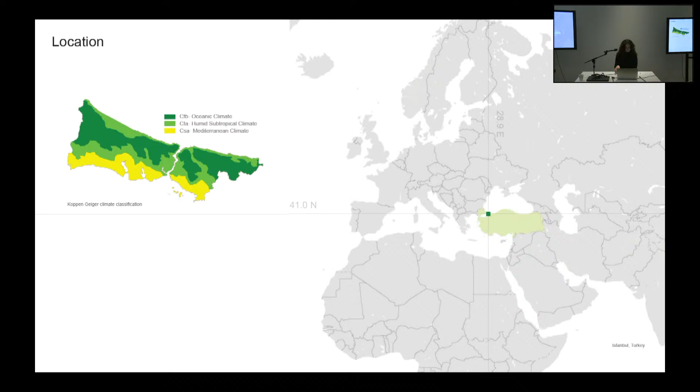Looking at the annual hourly climate, the cold period is from December to February, with limited solar radiation that barely reaches 400 watts per square meter. The temperature always ranges below comfort band, and in January and February it sometimes goes below 0. During summer, temperature generally ranges in comfort band with some overheating days in July and August. So overall, the primary concern would be the cold period.

The monthly average air temperature shows the cold period has a 7.9 average, with the coldest month being February with an average of 7.2 degrees. The warm period has an average of 24.2 degrees, with August being the warmest month with 25.4 degrees Celsius. Comparing it with the 2080 A2 future climate scenario, the monthly averages will be increasing 1.2 to 2.8 degrees.

Throughout the year, wind speed and direction are consistent. The dominant wind direction is northeast all year. The frequent wind velocity is about 5.3 meters per second with 25% frequency.

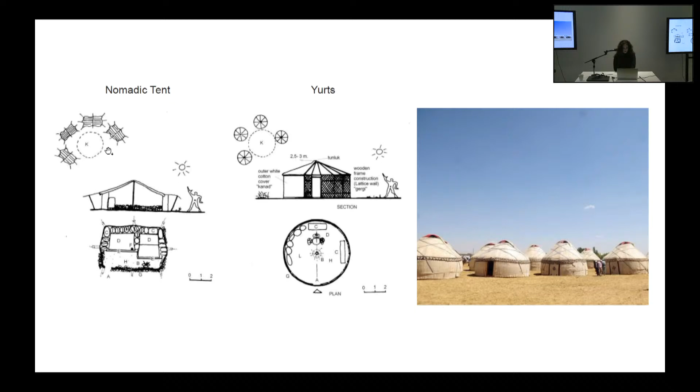In the tents, units were laid out separately, belonging to different units of the family and creating a central space in between.

This converts to the vernacular timber houses. It's pretty much developed from inner space to outer space, just like the nomadic tent. Some of the important features: first of all, there's a common space where the rooms open up. This is used as a multi-purpose transitional space, can also be interpreted as a square that connects all rooms. Wood is generally preferred for lightness, easy manufacture, and availability in the geography.

Another important feature is the projecting bay windows. While the ground floor is sitting on stone, the upper floors were adjusted with bay windows for privacy, sun, and ventilation. External shutters were operated for hot summer days and cold winters.

However, in contemporary concrete blocks, quite a lot of things have been lost, and housing scarcity encourages developers to embrace this type of typology. Some of the problematic aspects are the deep plan, strong division of spaces, isolated living room and kitchen, lack of consideration of orientation or occupant comfort, and lack of quality in building materials and interior finishes, because the first aim is to build really fast.

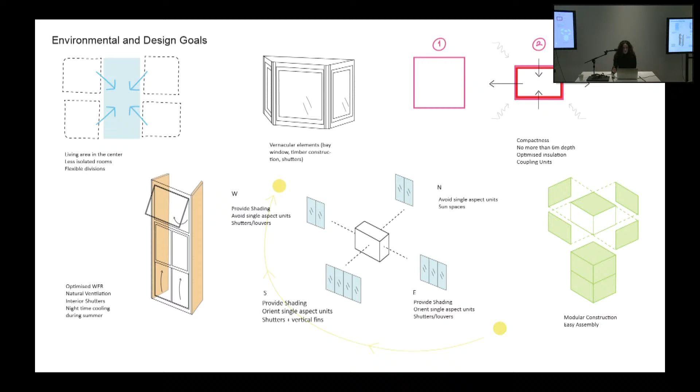There needs to be more attention given to the orientation and what's going on around with the obstructions, and more compact design that also allows easy assembly and construction. So the ideal module brings together all the main design concept and environmental concept ideas.

It is very compact and only provides essential facilities. With the addition of the bay window space, it's 35 square meters. The living room and the kitchen comes back to the center, and other functions are surrounding from the center.

The separation between the different functions of the spaces is flexible, and for double aspect units, openings can be provided in the bathrooms for daylight.

The addition of the bay window is functionally quite beneficial for a very compact layout, but at the same time it can be used as multi-purpose, like dining area, lounge area, or office.

So the unit is constructed with 1.2 by 2.4 CLT panels. The different configurations of panels can provide different layouts. The main benefits of prefabricated construction are efficient, fast construction, and high quality building envelope.

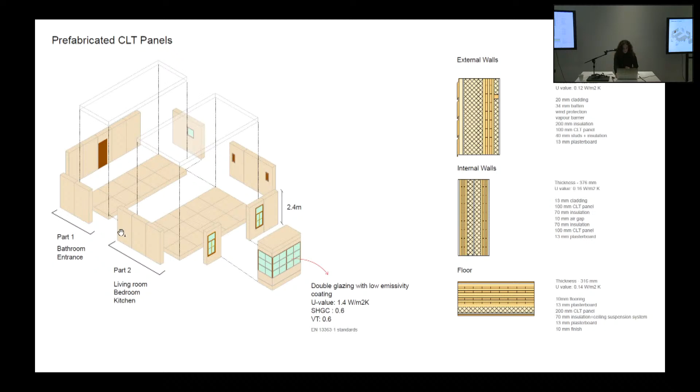And according to the transportation regulations, the module would consist of two parts, one including the bathroom and the other living room, bedroom, and kitchen. So how these modules can come together.

The project site is located in between the business center and residential area called Levent in Istanbul. The surrounding buildings are in close proximity, about 4 meters, and the street is quite narrow. These residential buildings are 2 to 6 stories high, having small local shops around the ground floor.

The project site is 19 degrees rotated to the north-south axis. There are roads to the north, main roads to the north and east. The south and west sun would be blocked by the surrounding residential buildings and the predominant wind in the northeast direction. The road on the east side is busier than the road on the north.

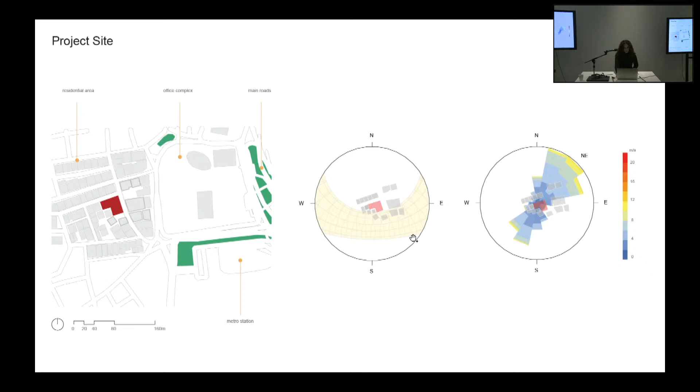Therefore, the apartment entrance is placed on the north and retail spaces are placed on the east side. Considering the compactness of the module, there's also a storage space given to the residents on the ground floor.

Moving on to the massing study reflects the site analysis. First, the raw massing site is offsetted from the streets to create adequate spaces because these facades also have windows. And the retail lobby and storage space is placed on the ground floor and modules are being stacked on top.

The common spaces are strategically placed in between the modules on the south and east facade with the core and circulation pad supporting these spaces. As you can see, the modules are oriented east and north where the main roads locate due to the limitations on the west and south facade and the close proximity of the buildings.

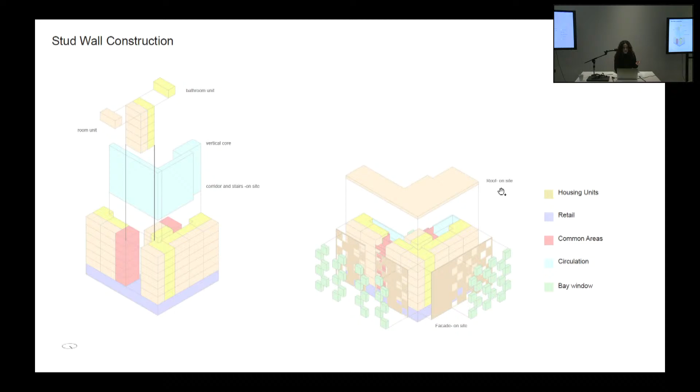So it will be built with stud wall construction where the bathroom units and room units will be delivered and it will be stacked on together, and the bay windows then would be in addition. The roof, facade, and the circulation would be built on site.

Again, the units are mainly oriented to main roads where they can also be benefited from solar gains. Coupling the units in the north is important, and the common spaces were integrated conceptually as the transitional central space. Also, the compactness of the units and occupants being students or young professionals, it's important to have these areas.

Looking at the solar radiation, it's during summer on east facade, where most of the units are oriented, gains radiation around 200 kilowatt hours on the top parts, and it reduces to 100 moving below.

On the north facade, there's very limited potential, around 70 kilowatt hours per square meters. And also during winter, all facades receive very limited radiation except the top floors of the south facade.

As there are very limited solar radiation during winter, in order to achieve thermal comfort in the modules, it is important to have an efficient envelope design and use of adaptive opportunities.

So analytical studies basically focuses on two modules, one looking to the east and one looking to the north. There are four main cases that has been illustrated here.

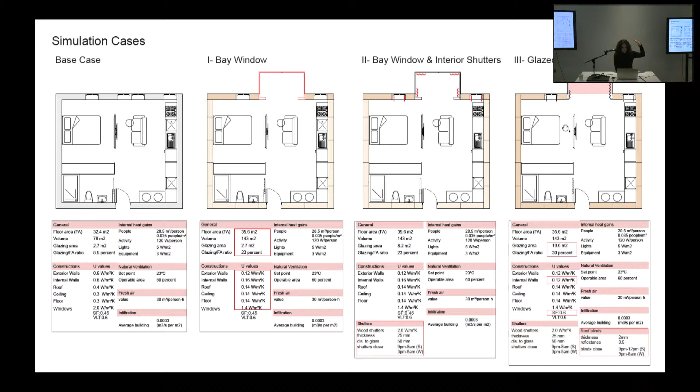The first case is addition of the bay windows and changing the construction to prefabricated CLT panels. The second case would be bay windows and interior shutters, and the third one would be addition of the glazing on top of the bay window roof.

The thermal simulation results show that during winter, the indoor operative temperature of the east module has potential to increase about 5 degrees from the base case on sunnier days. The indoor temperature remains stable, slightly below the comfort band, between 18 to 21 degrees.

During summer, compared to the base case, the glazed roof case increases the temperature about 4 degrees during the day, while keeping the same temperature at nighttime.

During spring, the indoor temperature of the east module increases about 3 to 6 degrees from the base case and ranges generally in the comfort band in free running, between 20 to 26 degrees.

During summer days, we can see the importance of radiation, as the extra glazing of the bay window sufficiently heats up the space. In order to avoid potential overheating, roof shading should be operated accordingly.

In autumn, the temperature increased about 5 degrees and stably ranges in the comfort band. The most affected seasons can be observed as spring and autumn.

In the east unit, the thermal comfort in free running mode shows only the addition of the bay window increases the comfort hours 7%. In east units, comfort hours increase a total of 23% with the addition of the bay window, interior shutters, and the roof glazing.

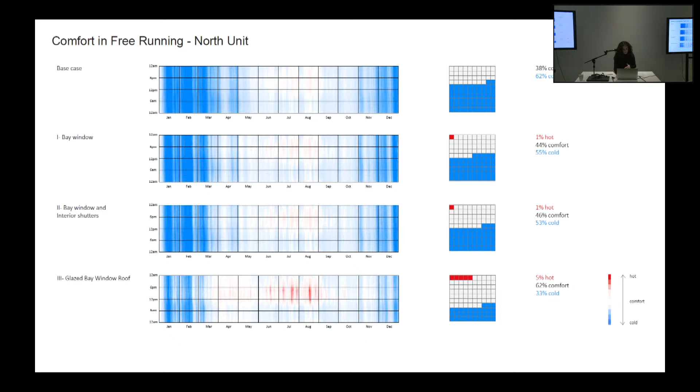Overall, the primary concern in the winter period is that the operative temperature of both east and north units ranges slightly below the comfort band. It is seen that the addition of bay windows is efficient for both orientations, north and east.

So the heating demand, looking at the cold period, from base case to the last tried case, for north it decreased from 25 to 13, and for east it decreases from 24 kilowatt hours to 11.

Daylight studies are run for two different targets for different spaces: 300 lux for living spaces and 100 lux for circulation and bathroom. Due to the open and narrow floor plan, the addition of the bay window, living spaces reach 300 lux target more than 50% of the time, and even the far back of the module receives 300 lux at least 30% of the time.

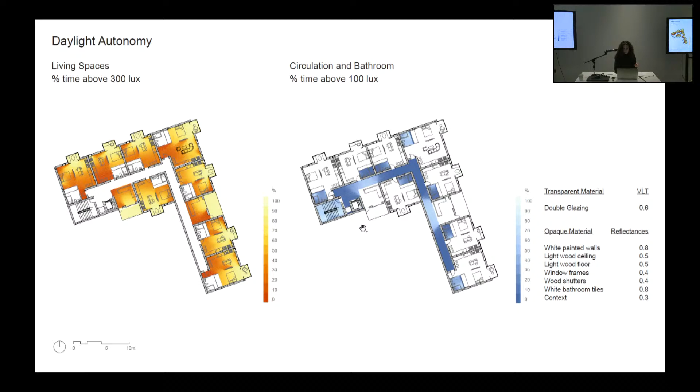The circulation path receives daylight from common areas that open to balconies. The units that have double aspect reach the target around 50% of the time. However, it is being lost for units that don't have the double aspect.

For conclusions, the compact unit provides essential facilities and spaces for 1 or 2 people to occupy the unit. The addition of the bay window, which is a traditional feature, is a multi-use space that can provide functional benefits and environmental benefits. Analytical studies show that there are also thermal and daylight benefits.

Overall, for both east and north orientations, the addition of the bay window brings benefits by providing daylight and becoming a solar protector and solar collector, by opening up to different orientations that the units would normally not open up to. And having a high glazing ratio, the bay window makes the space more sensitive, so therefore shutters and additional insulation during cold nights is important.

Further studies can be conducted with the operation of the shading devices, and right now there is a conceptual partition between the bay window and the actual module.

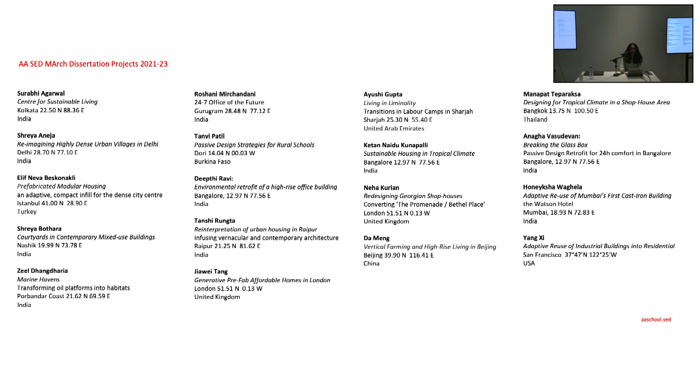I'm dealing with the glass box typology, and the title of my dissertation is Breaking the Glass Box, which is a passive design retrofit approach for 24-hour comfort in the context of Bangalore.

Just to set the scene as to where Bangalore is in the world, it is about 13 degrees north of the equator and is a city in the south of India.

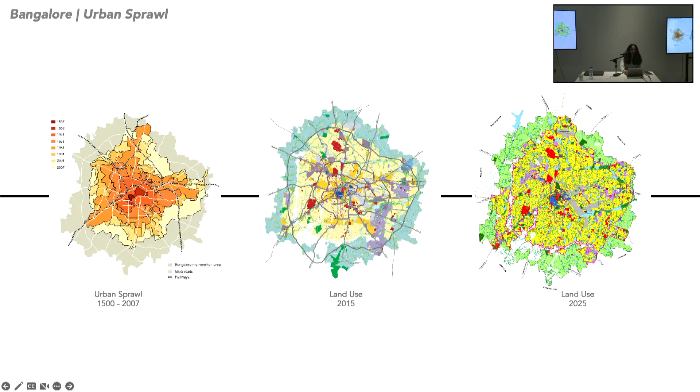Bangalore's always been a popular migrant hub, and the boom in the expansion of the city came after the 2008 global recession with the increase in demand for office use. Companies from the West outsourced their workforce to Bangalore, and this has snowballed over the past decade and a half to the growth of the city exceeding the municipal planning by an entire decade.

The architecture of the office typology in Bangalore has evolved from vernaculars and modernism towards a more globalized homogeneity over the past 3 to 4 decades, and the corresponding evolution in the organization of the workspace has been a more positive outcome, evolving from cellular offices to a more flexible and hybrid mode of working. The office typology has also evolved and adapted itself to the post-pandemic working environment.

That homogeneity has resulted in this prevalent glass box office typology, especially in Bangalore, which is based on Western notions of sophistication, especially because these companies' parent companies are from the West. The architecture tries to mimic those architectural features, and the concern from design, which is the lack of response to context, translates to an environmental problem where design is in conflict with its climate.

The glass box makes up a significant building stock in Bangalore, and hence demands a more critical look at improving the existing building stock rather than building new.

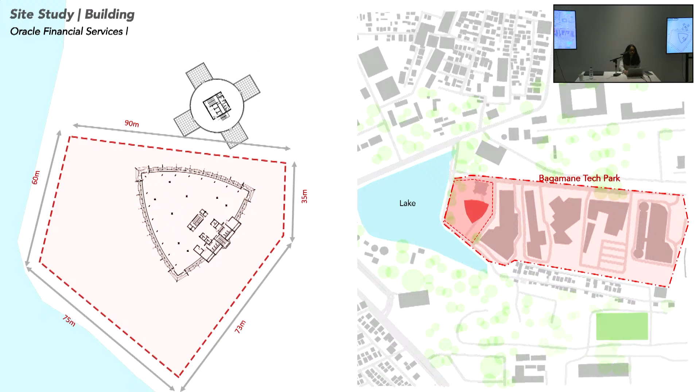Keeping the context of the city, climate, and typology in mind, the retrofit is based on one such office typology, characterized by mid-rise deep plan features. The building of interest, which serves as the site for the retrofit, is situated in a tech park. It's a corporate office for a financial corporation.

The intended use of the building was meant to look like this in the elevation, with its clear glazing and transparent outward-looking working environment. But because of the lack of foresight, the usage has now become a more inward-looking environment, with blinds making the facade opaque both from the outside as well as the inside.

This translates to the internal working environment, where the intention was favorable views towards the lakefront and glazing that would connect to the outside. However, it is now a very close, opaque, inward-looking environment with poor daylighting and dependence on artificial lighting. The glass box also lacks natural ventilation because it is a sealed envelope, with dependence on mechanical cooling year-round.

To summarize the usage of the building: the density is designed for about 800 workstations, but post-pandemic it's only in use for about 50% of occupants at a time. The resulting density is about 4 to 6 meters square per person, with high equipment loads due to density, as well as lighting loads from daytime dependency.

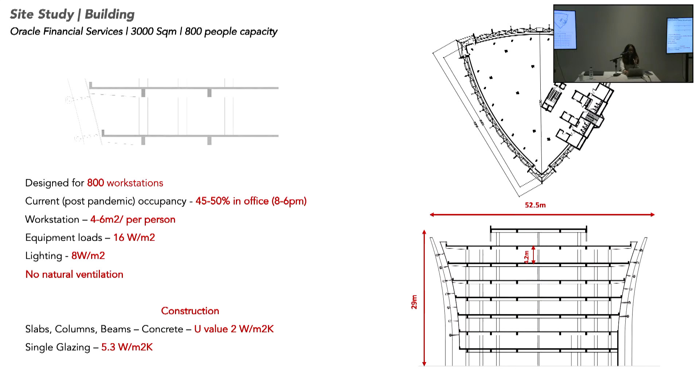To understand how the building performs, a data logger was installed for a summer week. The AC set point was at 26 degrees, but the building performs even in the middle of the space about 3 to 4 degrees above the set point temperature, indicating an inefficient envelope and high cooling demand loads.

Based on the context and the building's potential for design, a zoning strategy was considered. At the site level, we have restricted views to the north because the context is too close, but the lake faces the southwest, and those views are favorable for the working environment.

The existing access is between the buildings, and I felt there is more potential to route it from the lake and use the empty space of the site, which can then become the front of the building.

The typical floor is a very deep plan, so breaking the height-to-width ratio could be a potential strategy to investigate further, since the skin is a detached element from the structure of the building.

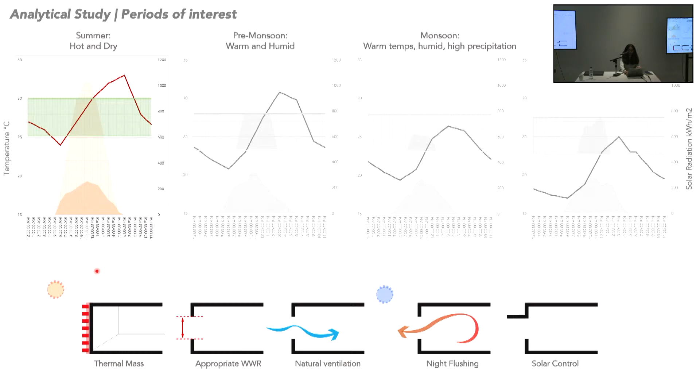A shoeboxing study was considered for 2 orientations, southeast and southwest, because the building is a triangle. For the southeast, the base case of the fully glazed building was iterated upon with suitable window-wall ratios and cross ventilation potential, to ascertain what depth of recession from the facade would be needed for both orientations.

Interestingly, because of the low latitude, the southeast and southwest were more or less symmetrical in the depth of overhang achieved from recessing the facade.

Translating these properties into thermal comfort would then be investigated for different optimization strategies.

For thermal comfort, the workstation density was modified based on post-COVID regulations of 10 meters square per person, meaning the resultant occupancy would almost become half of what we started with. The hypothesis was that if we de-densify the daytime, could the nighttime be used to increase the number of people using the space over the day with the same building requirement.

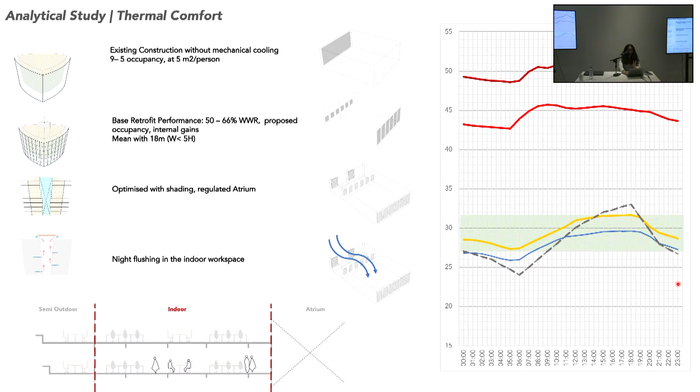The atrium environment was then examined for its cross-ventilation potential and its effect on wind flow through the building. The first image shows the case arrived at from recessing the shading and the resulting planning.

Based on the prevalent wind directions, which are quite symmetrical in the east and west, double-height spaces were introduced on alternating groups of levels to allow wind to flush through the atrium and ventilate the space. This helps deal with the stratification of temperatures, preventing hot air from accumulating across the upper levels of the atrium.

The third of the three working environments was the semi-outdoor space. Shading limits were established based on the proportions of the opening for the semi-outdoor space, for the two orientations in concern.

Because of high radiation throughout the year, shading was considered necessary for both orientations for most of the year, but at different times of day: the east orientation for mornings from 8 to noon, and the southwest orientation from noon to late afternoon, around 5pm.

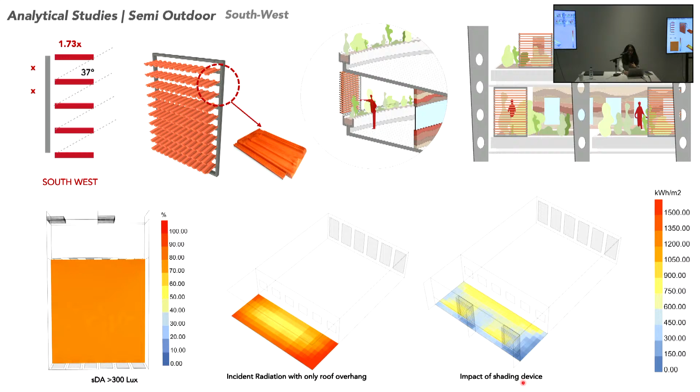Because the shading is adaptable and can be slid by the occupant, it would vary across the depth of the workspace depending on where the occupant was. The resultant UTCI on the facade showed a delta of about 3 degrees during the worst period of that day.

Because it's a flexible co-working space, the different proposed occupant groups are considered in terms of single working, smaller groups, larger groups, and social spaces.

Similar densities are achieved in the semi-outdoor space so the occupant can couple with it. The outdoor space is not an additional working environment, but a spill-out space from the density achieved inside.

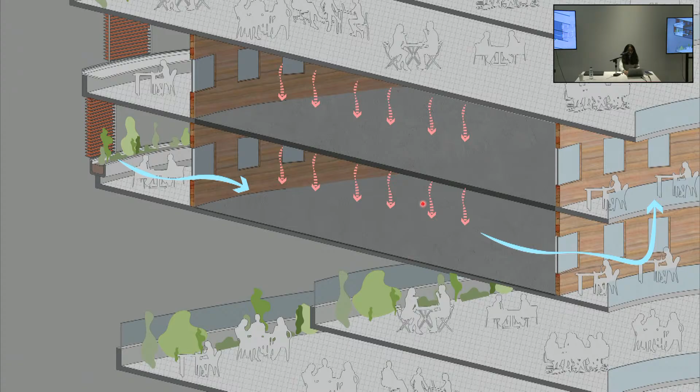Looking at the impact of this construction in the retrofit, I'm comparing the existing building's embodied carbon, just in its A1 to A3 stage, for just the superstructure, since that is the scope of the intervention. The existing building is largely concrete, glass, and some aluminium for cladding in portions of the facade. So the highest proportion of the carbon demand goes to concrete, then glass, then aluminium.

Then I'm comparing the proposal as a new build to see what the change is in carbon, but the proportions of material used - 80% still remains concrete because the same amount of structure is being used. There is some reduction in glass, but because of the glazing being used both in the atrium as well as the outside, there isn't a significant reduction in the usage of glass in the building.

But because of rammed earth, the aluminium component is replaced by some amount of soil and aggregates. Looking at this proposal as a retrofit, it would completely eliminate the demand for concrete, because we're using an existing structure, and the upfront carbon is offset by 80% because of that.

And the amount of concrete that I'm demolishing in the creation of the atrium or the removal of the slabs is reutilized in the rammed earth, because the rammed earth I'm proposing is made out of the debris - that's the advantage of using in situ construction for rammed earth.

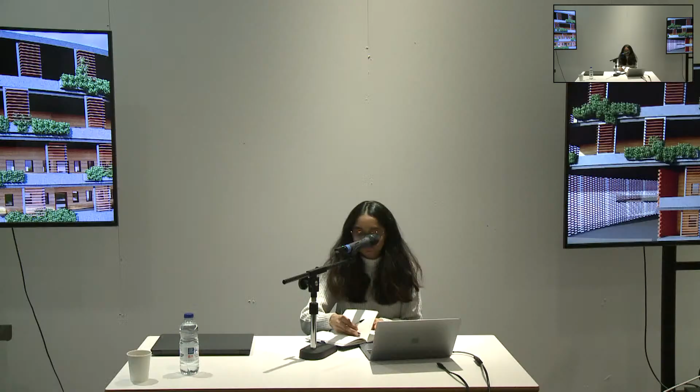Thank you, Paula. Maybe I can say a few words. Thank you, Annika, for your presentation and clear visuals of the project. I'm going to be very brief. I think your project is responding to a super urgent need, which is the retrofit of these buildings, which are new buildings, reasonably new. So very well picked.

Reflecting on everything you presented, I would take one step back - I think there is a little story missing that you are addressing technically, but in terms of design approach, I think it justifies the approach. What I missed in your presentation is a small intro about the importance of semi-open and outdoor spaces in the new working cultures of today. You are not retrofitting a building for the same office activities that were there 10 or 20 years ago. We work in new ways now.

We expect different qualities from a working space than we expected a couple of decades ago when these buildings were built. In addition to that, the notion of adaptive comfort and adaptive strategies, and the idea that comfort is a much wider and more acceptable notion, supports this new architecture that we have to develop. So this is more of an intro - I think it's very important because it justifies a lot of what you're doing and its importance.

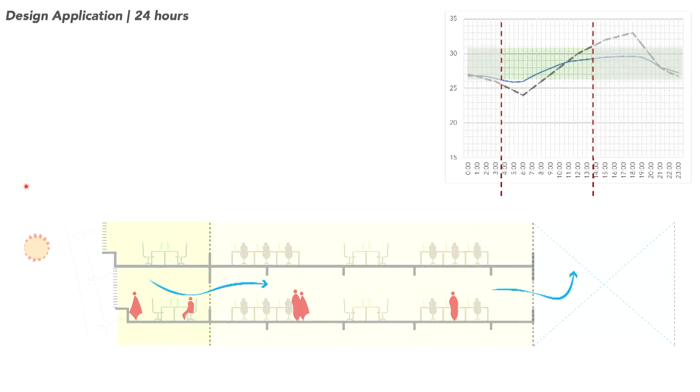At different times of the day—I don't know if the monsoon changes a lot of things—but then how, if say I'm in a meeting room, can I have it in the semi-outdoor? Should I have it at the center of the plan, or the periphery reserved to more permanent or temporary positions? How is the life in that office actually happening across the seasons, and what's really offered to me, what can I really adapt?

I saw the terracotta and shading device. At first I was thinking, why did you just put it in some places right in front of the window? Then I realized that the sun path in Bangalore must be quite narrow in a way. It should be, the sun is quite vertical. It still comes from the south—you're still 13 degrees away from the equator—but it's quite constant in the afternoon.

You wouldn't have really horizontal sun rays hitting the windows, right? So in the end, those shading devices can also be fixed in a way. Just the adaptation happens on the angle of the louvers or the angle of the terracotta.

So quite a clever way, but then I joined Joanna in asking the reason why you chose a window-to-wall ratio that was quite constrained in a way. It was based on the daylighting requirements for the office space, which was significantly lowered because of the use of screens, and that's what pushed me to have more significant solidity.

Okay, and lastly, I wonder if it's always good to make... I really find it interesting to make the exercise of thinking of a 24-hour passive building in the tropics. Do you see any way that this could work in a hybrid mode? Is air conditioning completely incompatible here, or how do you see that?

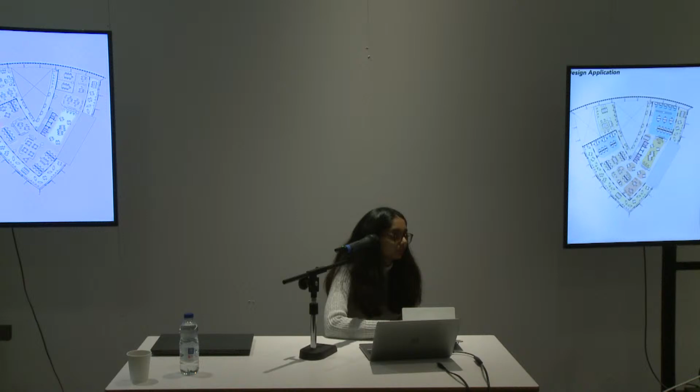Because I'm sure you have thought about it in some depth. And probably in relation to that, if you could have - this is beyond what you can do - images that illustrate this for us to understand and relate to how that building is going to be used, it helps build up your narrative on how you're reshaping an asset or a building that already exists, that is terribly unfit for purpose as you've shown us, and how you're adapting that to the new post-COVID reality of workplaces.

I don't want to extend too much, but I think overall you have tackled the problem with a very thoughtful architectural mindset, like you're sorting it out with architectural strategies, and that is very commendable to see. So yeah, well done.

Thank you so much. I was just thinking that for the developer, the 24-hour work is profit, but for us it's a hypothesis that comes to mind as researchers through an understanding of the climate. So you're looking at the climate you're experiencing as an inhabitant and so forth, and you realize that certain conditions take place at certain times of the year that are amenable to an understanding of comfortable existence.

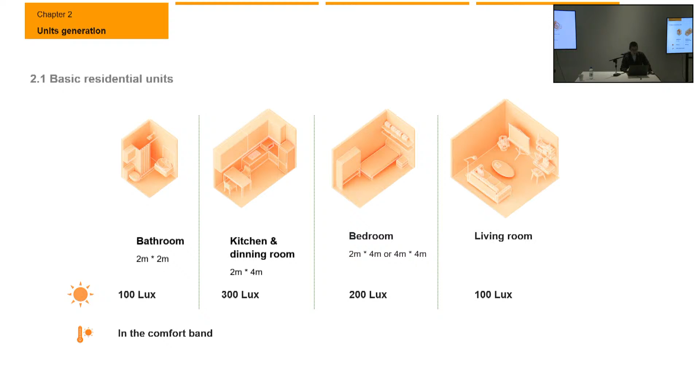For every room, I set standards. For example, the kitchen needs more daylight, so it will be 300 lux, and the bedroom is 200 lux. According to these standards, I have my draft plan, where one side of the room faces outside and the other faces the corridor.

For the material and structure of my flat, I did a case study on Murray Grove, a prefabricated house made of solid timber, completed within 49 weeks. My material selection will also be timber prefab structure, because it has good sound insulation. Since my site is quite close to London City Airport, sound insulation is also very important, and timber also has good thermal insulation.

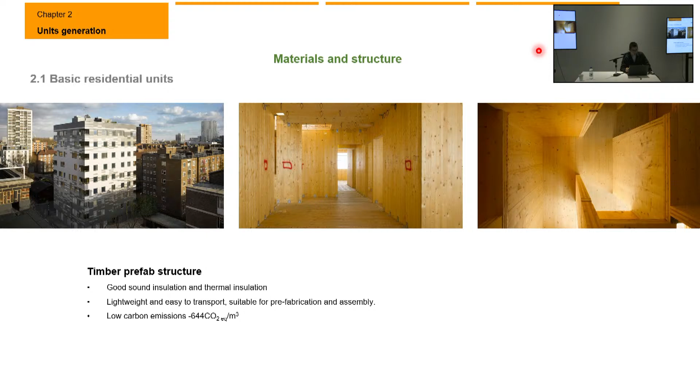Before the flats are combined together into the whole building, the first question I need to solve is ensuring each apartment has good interior parameters. The objective is to keep every room's SDA more than 50% at 300 lux, and all rooms in the comfort band. To improve these two objectives, I have 3 methods: change the floor plans, add extra windows, and add solar control.

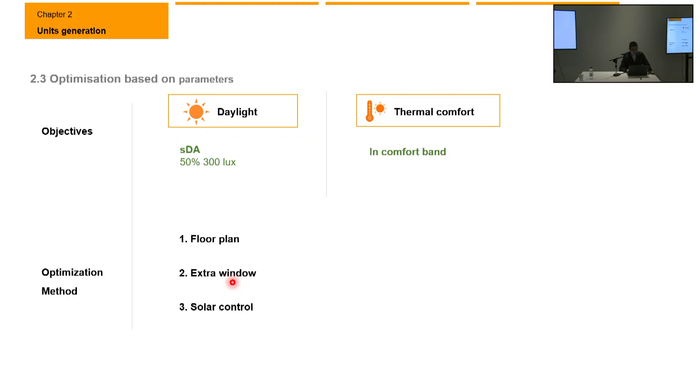First, I did the simulation on the base model with free running, meaning no cooling and no heating. For the light condition, I did simulations for 4 orientations, and the results are shown on the right side. These are the results for the 6 different types of my flats.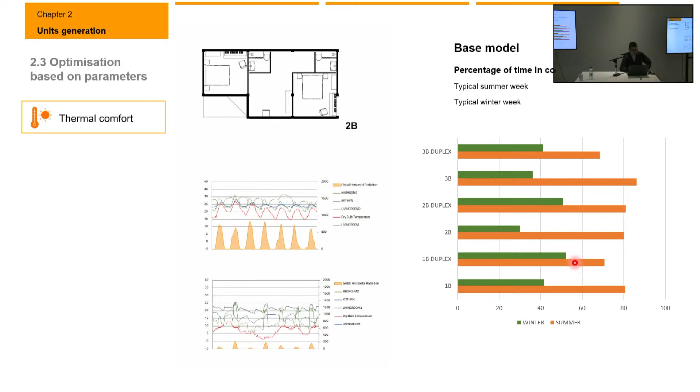So the conclusion of the base model is that some rooms' SDA is below 15%, and there is an overheating problem in summer, but the energy consumption in winter is acceptable. So I need to solve these first 2 problems.

First, I change the floor plan. For example, this is a 1-bedroom flat duplex, and I remove these walls to let the sunlight come inside, because the wall blocks all of the sunlight, so the bedroom behind doesn't have enough sunlight. So removing some of the wall will improve the light condition.

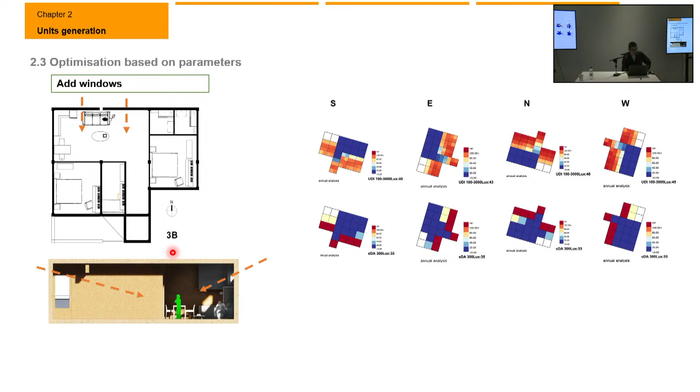And I also add extra windows to help more light come inside, and also help the natural ventilation. And then I also add solar control to block some of the solar radiation in the summertime.

So the result of the improved model, we can see that for every 6 flats, the SDA is more than 15%. And the percentage of time in the comfort band is all around 92% to 96%, so it's quite good.

I also have some adaptive design for my flat, which means the users can choose some of the elements, like the balcony - I have 3 options for them - and they can also choose whether they want the extra windows. Because some of the room types don't have this kind of light problem - they have enough daylight, so they can choose whether they want extra windows. And they can also change their floor plans.

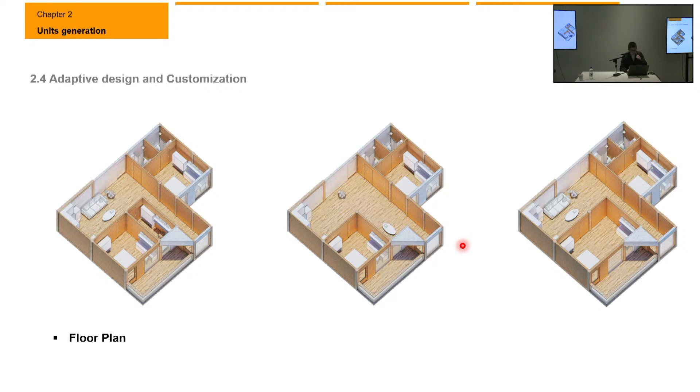And another thing for my modular flats is that after use for maybe several decades, it's easy to repair and recycle because it's all modular timber slabs.

And chapter 3 is the estate formation. Now we have the units with good interior environmental parameters, so the second question we need to solve is how to ensure the apartments won't interfere with other apartments when they combine together. So I do the analysis in 2 aspects, which is the light blockage and the exposed envelope.

First, when we just combine these flats together, some of the flats may block the sunlight from others. So I need to figure out how much space is needed between these flats and how high it will take before it blocks others' daylight.

So I'm doing the analysis on this, and the result is that we need at least 4 to 8 meters void between 2 flats, and the maximum height of the outside context will be 7 meters, which is about 2 floors.

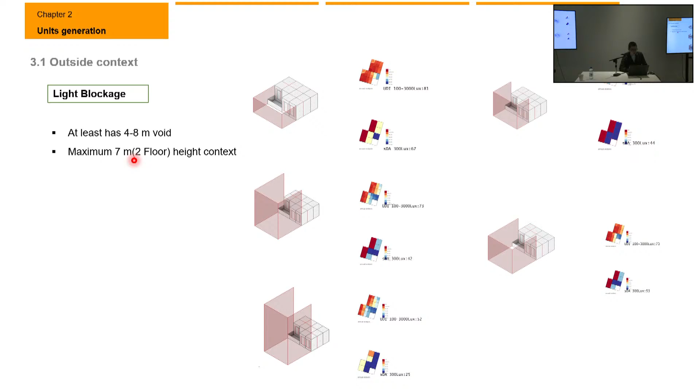And another thing is the exposed envelope. This is one of our flats, and one side faces the corridor, one side faces the outside. And there are 4 other sides which may be connected to other units, or it may be just a void. So I need to determine how much area of the envelope could be exposed.

And I have analyzed the time in the comfort band in a typical winter week. Then we can see that scenario 1 and scenario 11 have very bad thermal comfort performance. This is because scenario 1 has 3 sides exposed, and scenario 11 has 4 sides exposed. So too much envelope exposed makes the heat loss increase.

So when combined together, I will reduce the exposed envelope, making the flats connect to each other more closely.

Then the third question of the whole estate is how many apartments and other areas do we need? For the housing density in London, it's about 31 to 345 dwellings per hectare. And for the area of Royal Dock it's 15 to 110 dwellings per hectare.

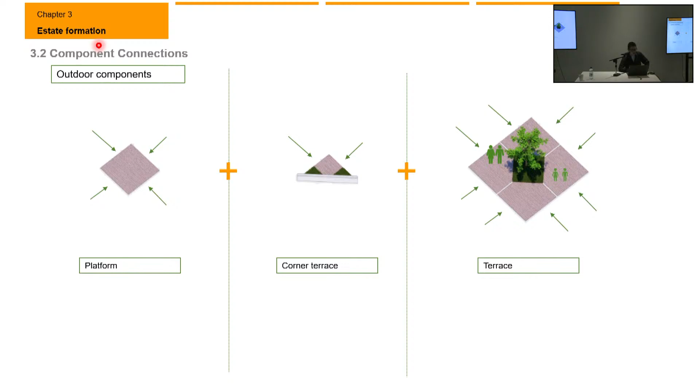So I selected my density as 150 dwellings per hectare, which is about 350 flats. I also designed the outside space for the adults and children, consisting of outside components like the platform and corner terrace, and they will combine and connect to the flat modules to generate the whole estate.

And these are the quantities of different components. We will have 40 flat A, which is the 1-bedroom rooms, and also 40 1-bedroom duplex, and these are all of the numbers, the quantities.

Yes, the numbers of each component. It will have 340 flats, and I don't calculate the outdoor modules.

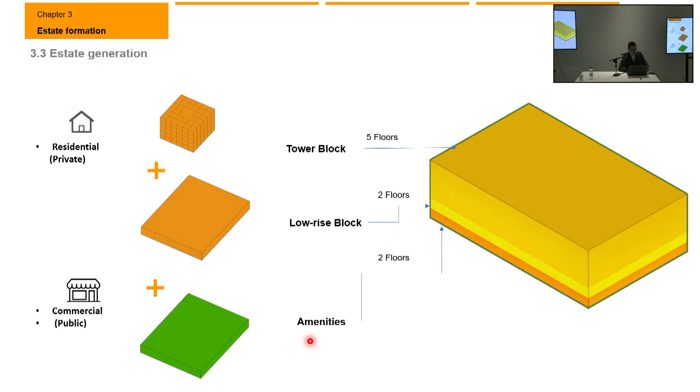So for the whole estate, we'll have 3 areas, which is the tower block, the low-rise block, and amenities. The tower block will be located at the top, about 5 floors, then the low-rise block will occupy 2 floors, and the amenities will be at the bottom with 2 floors.

So for the tower blocks, we will have a core in the center, and the flats are around the core, with elevators and stairs in the core. Each core will connect to approximately 8 flats per floor, so we'll have 5 cores for the whole estate.

Yes. Oh, I will go through faster. Okay, sure.

So the first thing is I need to determine the location of the tower blocks. So I do the daylight simulation. Because the tower block is on the top, it will affect the other levels. So I find out the best location of the tower blocks, which have the least effect on the other low-rise blocks. So these are the core locations.

And because some parts still have very bad light conditions, I reduce this space from the whole boundaries, which means these two voids will not generate any units.

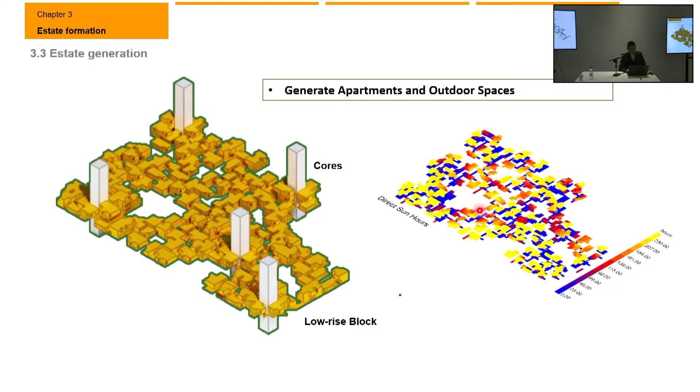Then I first generate the low-level blocks, and I also do the simulation of every room. Then I generate the tower blocks.

These are the final residential part of my estate. Then I also add the levels. So this is the final rendering of my whole estate.

Thank you. That's all. Thank you.

No, sorry, it's my fault. Sorry. It's working, yeah, but half, maybe?

Thank you, Joey, for the presentation. You have a very interesting approach, a very different approach. I think the presentation was very clear, and all the graphics, how you have explained it and taken us through this very complex and technological approach, that's commendable, because otherwise it would have been much harder to follow all the iterations and studies you have done.

I think it would have been interesting for someone new to your project to get a little more context on the problem you're trying to solve. We're all aware in general of the lack of housing and affordable housing in London, but it would be good to put some more figures or context. What kind of housing do we mean? Is it for one person, two people, three people? What families are we trying to accommodate? And what do we mean by affordable?

Especially when we see the result of your optimization process at the end, where we see all these boxes stacked, we can see the amount of exposed area. It's a very porous design. There's a lot of exposed surface, right? Yes, yes. So we're just wondering, how do you optimize the heated envelope? We want to see how you resolve those issues, because otherwise there's a lot of heat loss, even though they're opaque surfaces.

And also in between all of this, I think I would have liked to see the circulation areas. How are these units connected? Because they are individual units or double units, but then is there a common area, a shared area, circulation areas, and how do you lay out the plan according to orientation, maybe, something like that. Those were the comments, I hope they're helpful. Yes, thank you.

Thank you. I thought the visual presentation is excellent, and you should continue working in this way in terms of showing things. My problem is with the things you're showing - there is a problem there.

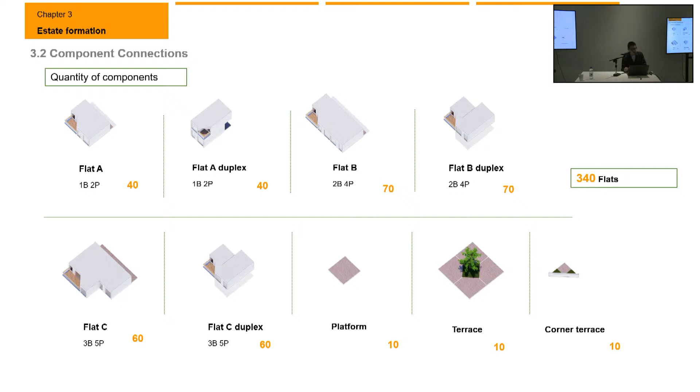Are you testing the orientations? The interior one or the whole estate? When you tested the individual units, yes, the very first generative exercise, is it orientation that is varying? Yes, this one. Is it? It's orientation, yes, it's four orientations.

Okay, because that process, maybe the generative script helps you do it a bit quicker, but this is something you don't need a parameterized model for, no? That's what we normally do, just turning the model. Is that correct? Yes, just turn around the models and then do the simulation. Okay, because the point is, we are...

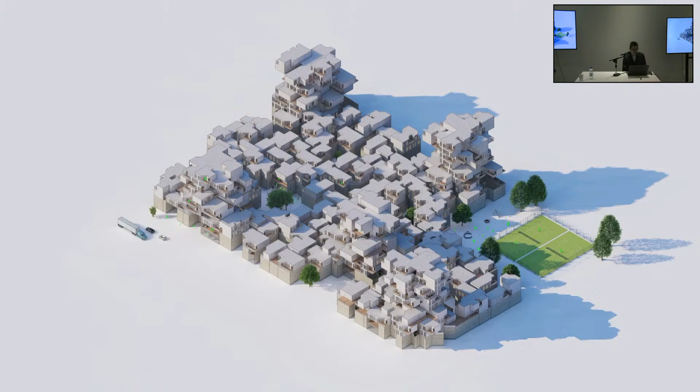Thank you, Java. I agree it was a very good presentation, and thank you for not exceeding too much the 15 minutes, because a few days ago you had 85 slides. Yes, I reduced many of them.

I think nevertheless it was very useful, the comments you got here, because it's about how you need to tell your story in the book, maybe only shuffling things and highlighting—like taking this last comment from Joanna, about environmental criteria—but you manipulated a lot during the process, changing your script during your working process for including architectural criteria as well.

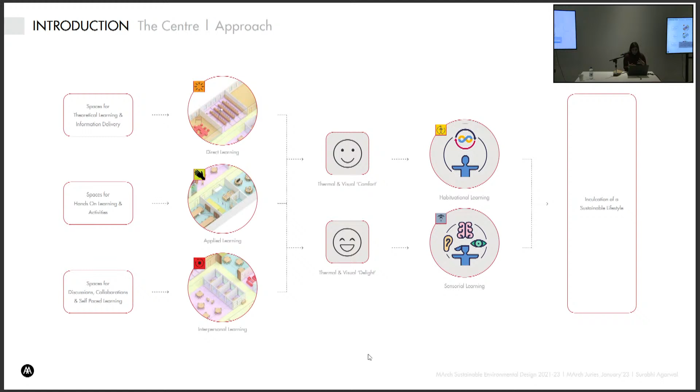Whereas in terms of the delight aspect, it will inculcate sensorial learning through the experience of the space. And all of this would eventually inculcate the theme of the project. Just to give a little bit of context, it's located in the city of Kolkata, which is at 22...

Okay, yes. So just providing a little bit of the context of where the site is located, it's situated in the city of Kolkata, which is 22.655 degrees north, very close to the Tropic of Cancer. Zooming in a little bit, the site is further located in a park called the Eco Park in the city. Moving on to the climate analysis of the place.

Broadly, the climate can be divided into three major seasons. First is the hot, dry period, which has moderate to very high temperatures during the day and higher swings. The second is the warm, humid period, where temperatures are moderate all along but the swing is really low, giving a very high relative humidity of approximately 83% on average. And then a cool period where temperatures are moderate and the swing is a little higher.

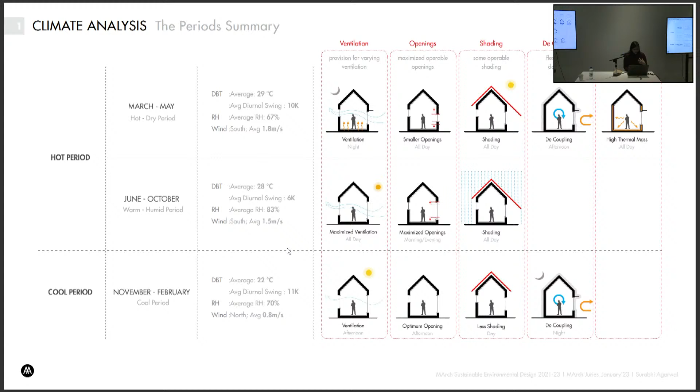To summarize, the periods can be broadly divided into the hot period and the cool period, and the hot period can be further broken down into two distinct phases: the hot dry and the warm humid. As we know, the strategies undertaken to achieve comfort for these two periods can be quite different, so it was important to explore these through analytical work to find what strategies really work for the climate. But before that, I'd like to show some visuals of what the vernacular of the place looked like versus what the contemporary city now looks like.

So to the left, you can see that aspects such as thermal mass, double roof, and elements such as the veranda and the courtyard kind of dictate the vernacular of the region, whereas in terms of the urban city, it's more of a multi-storied, single aspect, and smaller window-to-wall ratio situation.

So moving on to the analytical work, and deriving from this, a methodology was formulated. The first step was establishing a base case, which came directly from the current contemporary standards for building.

Step 2 was design optimization, which looked at reducing solar gains through optimizing orientation, shading, and window-to-wall ratios, and providing natural ventilation. Next was elemental optimization, which looked at the envelope as a whole, studying optimizing materials of roof, floor, and wall.

The next step, because I am dealing with learning spaces, density tends to become quite a huge problem at times, with larger densities to smaller densities varying. Therefore, it was important to further understand iterations between how the space behaves with various densities.

And moving on to analysis B, where I looked at the outdoor spaces and understood comfort for the two types of spaces I just spoke about, which is verandas and courtyards, deriving from the vernacular.

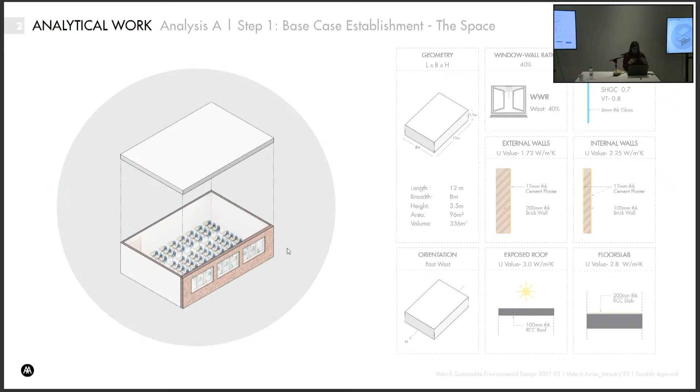So speaking of establishing the base case, it's a 12 by 8 meter space, and like I mentioned, the construction is of the contemporary standard with an RCC floor and roof and brick walls.

Next is moving on to the establishment of the various densities. So I took the three types of learning spaces that I spoke about initially, and they each had different varying densities and corresponding loads to them.

For the case of analytical work, I took the highest density, which is case 1 of a classroom. It was analyzed for a base case where the orientation is east-west. There's no shading provided at the moment. No natural ventilation is considered for now, and the window-to-wall ratio is facing west with a 40% opening.

And it was plotted for 3 typical days, picking one from each of 3 periods. It was observed that the red line is the base case scenario with temperature and humidity plotted, and it can be observed that throughout the year, we are above the outdoor temperature by approximately 6 to 7 degrees Celsius.

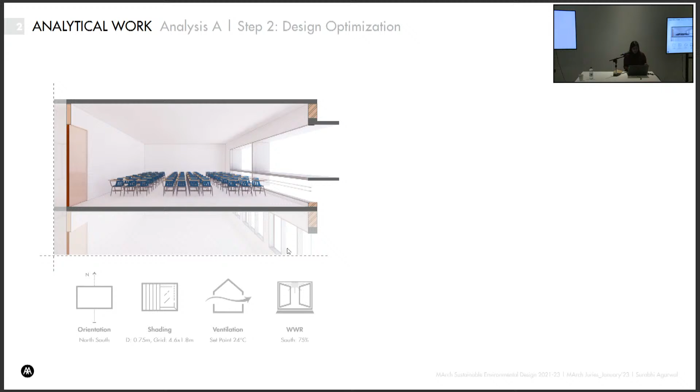However, with design optimization, optimizing each of these aspects that I mentioned, it was possible to reduce the delta by approximately 4 degrees from the base case, hence improving comfort.

Further on, I spoke about how optimizing the envelope was necessary, and therefore the floor and walls were changed to rammed earth, taking from the aspects of mass that we just saw in the vernacular image, and the roof, which is a double roof situation where I took a filler slab with an added extra double roof. This further led to a drop of approximately minus 6 degrees Celsius across the year.

To summarize these different steps, I plotted the comfort percentage across each of the steps and how they impact comfort. What you see in green is the comfort percentage for each step, and you can see from step 1 to the final step, the comfort goes up from 8% to approximately 82%.

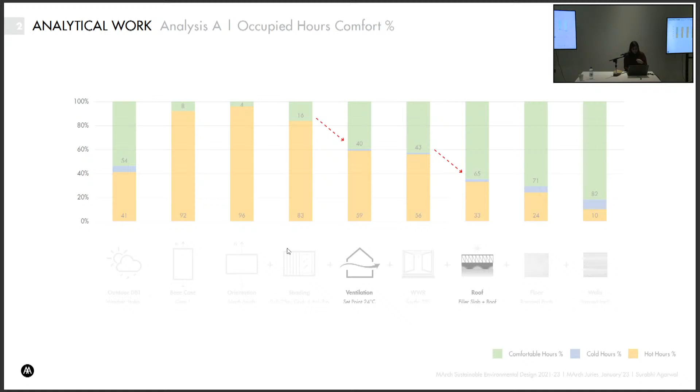And just to focus on the major key driving aspects that improved the comfort, it was ventilation and reduced solar gains via the roof.

Like I mentioned about density, in this particular case, the varying densities did not show much of an impact on the comfort itself, and this could probably be attributed to how the space is naturally ventilated, kind of neutralizing the gains.

And moving on, the outdoor setup was such that it was adjacent to the veranda space and then the courtyard space. These were the two major aspects that were studied.

And UTCI studies were carried out for the verandas, and it was observed that with optimal shading, after carrying out shading studies, approximately 60% comfort could be achieved for east-west facing verandas as well as north-south facing verandas across the year for occupied hours.

Also, the courtyards were studied for wind. As I mentioned, humidity is an issue in the area, therefore wind velocities and wind speeds were important at pedestrian level. So an enclosed courtyard versus a single open versus a double open courtyard were tested, and the wind velocities, as expected, did seem to improve in those cases.

And moving from that, taking from the analytical work, a form was developed for the project. But before I get into that, I would just like to place a little more about the context of where my site is.

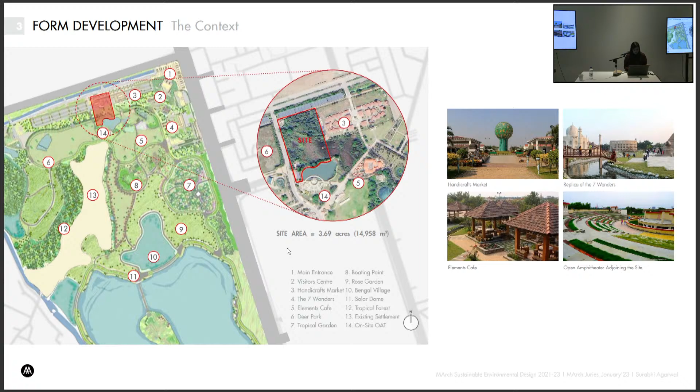Now developing on that, the program of deriving for the three learning spaces. The space tested of 12 by 8 meters was directly taken here and multiplied based on the requirement. In terms of organization, the direct learning space was imagined to be more formal and organized, whereas the applied learning was more organic, clustered with niches and breakout spaces. For interpersonal learning, it was imagined to be a mix of both with semi-formal spaces.

Just an overview of the site in terms of how the sun angles are really high, being in the tropics. The summer winds are from the south and the winter winds are from the north.

For the zoning of the site, taking the spaces I just defined, I zoned them and left a big central green open to integrate with the bigger park area. The orientation was north-south as we derived from the analytical work, and the south was left fairly open to allow the free flow of wind in the summers.

A pedestrian circulation was added to connect these blocks, and then a series of steps were taken to reduce radiation on the envelope overall. The first step was staggering it in plan. The next was staggering it in height to reduce it on the roof. And then further, adding an extra roof to further reduce the radiation on top.

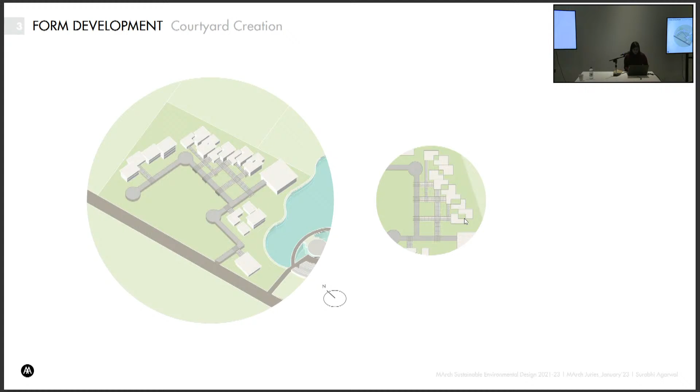This was then added on with more pedestrian links to link all of the spaces, all of them being shaded. And then further, smaller courtyards were inserted between the spaces to act as breakout spaces for these workshops.

Wind was tested. However, it's not surprising that the wind velocities were a lot lower in these courtyard spaces, and therefore chamfers were created in the wall, which led to an improved wind speed, as you can see here.

After this, a hierarchy of outdoor spaces could be derived: verandas and terraces, smaller courtyards which would be more intimate courtyards for zone-specific activities, mid-sized courtyards which would be spill-out spaces and could act as exhibit spaces as well, and large central courtyards, which was essentially a continuation to the existing eco-park. So deriving from whatever materials I've used, I arrived at this after carrying out the analytical work.

This is what the developed form kind of looks like.

Now comfort studies were undertaken to understand where I am in terms of comfort after having gone through this design exercise. Firstly, the outdoor spaces were tested for UTCI to understand comfort, and they were plotted across the three typical days and for four different hours of the day.

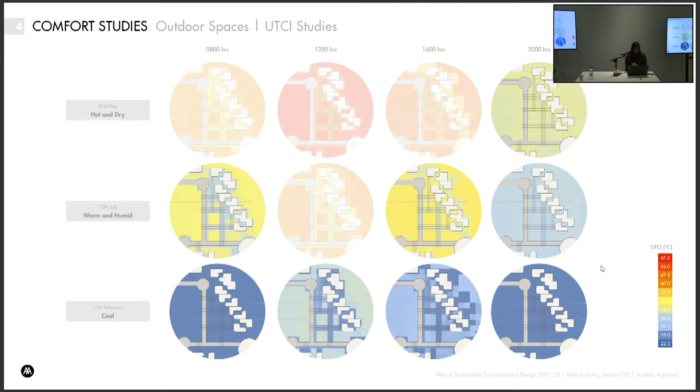It was observed that during the warm, humid period, one could expect to be comfortable most times of the day, except the very high solar hours at 12. However, in the hot and dry period, only the evenings could be fairly comfortable, around 8. Whereas in the cool period, you could be outdoors almost all day.

So for testing the indoor spaces, the workshop was picked as a test, and one of the workshops was chosen. On the right, you can see an exploded view of that workshop space, just to understand how the space finally evolved to achieve the design goals.

You can see these smaller niches which would facilitate smaller group activities in a hands-on workshop space. The idea was to provide each of these spaces with a shaded spill-out space in the form of smaller courtyards, verandas, or a terrace space. What you see above is how the roof framework has been developed.

In terms of the inputs, they were all derived from the analytical work. This is what we see as the thermal performance of the space in a base scenario, where on the hot days the space has been ventilated, whereas on a cold day the ventilation has been minimized.

However, it was very important for me to incorporate adaptive opportunities for the occupants, and therefore a strategy was developed which would further improve the situation. So for a hot and dry case, decoupling the afternoon and night ventilation improved the comfort significantly. However, in the cool period, ventilation improved the comfort.

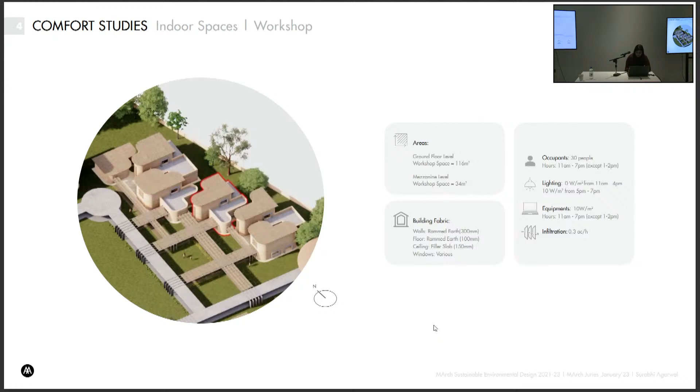And also, just one last comment. Was the wind scale inverted? Because you were showing the wind plans, and it seemed—maybe I don't manage to see from here—the dark blue says 0, right? So you have the highest on the bottom and the top. Okay, no, maybe it's from here that I don't manage to see it well.

No worries. So in general, the plans are at a very large scale, and the building is sorted. I think we're missing a scale in between the windows and these massing plans. It would have been good if you could develop more that building in general scale. Thank you, Flo.

You have some very nice images at the end of the project, and I had seen them before, but seeing them again, they are a surprise, because in a way they come out of the blue, which is fantastic. But we also want to be able to connect things, and we have these end images, and we have a process that included analytical work.

I think it was mentioned by Flo, but when I look at the first model of the classroom, I can't connect it, I can't compare it with this stuff. Because that classroom looked like having arbitrary dimensions. It was single-sided, no reason whatsoever for it to be that, and therefore not possible inspiration for anything. So what was the inspiration? We have a disconnection there which you need to explain. So that's one point.

Then I have a point which is addressed to everybody else as well, about comfort hours. In all the presentations, this percentage was given, and it was always lower than 100. So therefore there were hours that were not comfortable, and we've never discussed them.

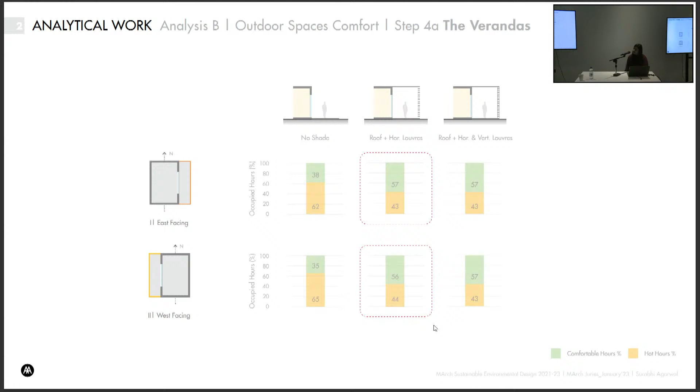So how uncomfortable were they? How long did the discomfort last for? These are the crucial questions - not necessarily the comfort hours, but the discomfort hours. It could be that a project is stopped and not continued because it looks like the comfort hours are not that great, but when you analyze the discomfort hours, they could turn out not to be so bad.

I think at least a comment should be made, because it will help several of your projects that do not appear to have very good comfort hours. Now you have good results at the end, something like 80%. But again, what's the other 20% doing? When is it happening? For how long is it happening? Whom is it affecting? Is that a problem? Can it be improved? In order for it to be improved, we need to know more about it.

So these are my comments. The comment that I made about the surprise between the outcome and the input towards it, I think does need an explanation. Maybe you can say something about this.

So I feel like the difference is - the idea was to evolve from what I established from the space that I was analyzing, which was a 12 by 8. And then I did - these were the initial boxes that I took, which are the same spaces that I initially analyzed.

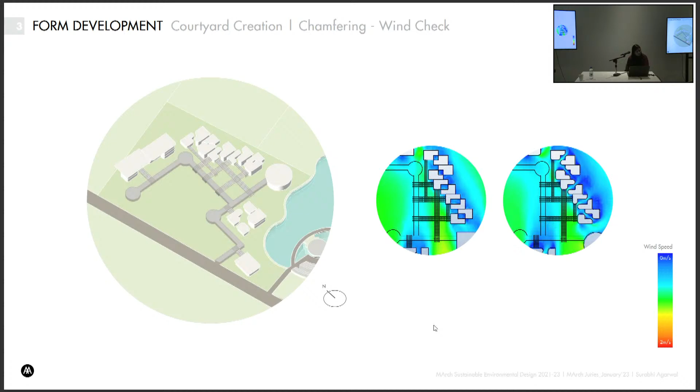Just wrapping up quickly, in addition to what was commented, I would like to add a few things. One is about the form development, which relates to the discussion of the classroom as well, where you have three different types of learning spaces.

It never occurred to me until today, when you showed these different ways of starting the form development, that in a way all of them benefit from transitional spaces - balconies, courtyard. I was wondering why the more direct learning has to be more formally organized. Maybe the best way of presenting them is by establishing this relationship with the outside, the possibility of spilling out, and the relationship with the different kinds of outside spaces, where you nicely created a hierarchy.

Then right at the end, when you talk about thermal delight, you mentioned the temperatures. That was very clear, but there are some other variables for thermal comfort and delight - the surface temperatures, and more or less wind.

Definitely these two, and even maybe being in the shade, or in the sun, or in partial shade. So if you have this data from your simulations, if you can add more to that, you can characterize the sensorial experience better. I would encourage you to do that. Otherwise it's just temperatures, and you have these massive walls that will have very low surface temperatures, hopefully.

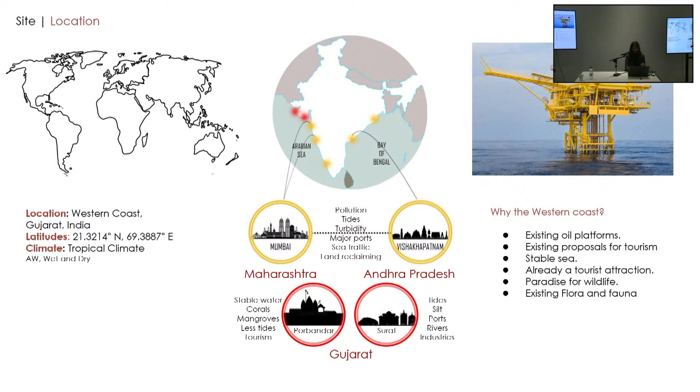And therefore, if you see the existing location of the platform, it is 10 kilometers away from the port, which was planned to extract oil. However, this platform, being adaptable, could be relocated up to 2 kilometers away from the port, achieving the minimum depth required for the structure to be fixed.

The main reason was to reduce the marine risk and have an easier commute with the existing port, which is at Porbandar, where the boats and ships have docked already.

The latitudes I am considering are 21.32 degrees north and 69.38 degrees east in the tropical climate, where the average yearly temperature is 26 degrees Celsius with diurnal swings up to 10 degrees. The temperature graph clearly shows two periods: warm and humid from May to September, while the other months are hot and dry.

The key strategy is to have shading and natural ventilation throughout these periods. Before going ahead, the space's contemplation of the sea and the natural climate was observed, whereas for outdoor comfort, extreme heat exposure and high wind velocities are a threat. For the internal spaces, the primary consideration was the connection to the sea while maintaining adaptability and achieving permeability as well as privacy.

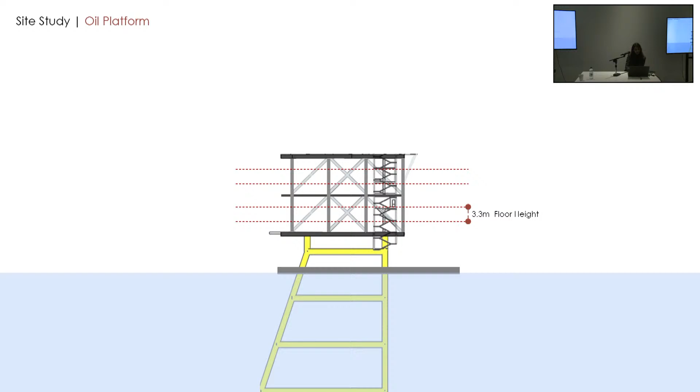Since the platform is narrow, to create a wider ground space, two platforms are connected 10 meters apart, forming one unit together.

Considering the master plan of the whole cluster to see how the unit will collaborate with other units, the project as a cluster is manifested through a series of platforms that can accommodate the infrastructure. More units are connected together, forming a cluster to maintain a circular economy.

The units of the cluster are further connected with bridges through water transportation. The distances are determined by balancing connectivity, walkability, and preventing wind shadows on each platform.

This cluster could be further expanded by attaching a dock, called the arrival level for the cluster. I then simulated the cluster in two orientations, which have potential connectivity to the port.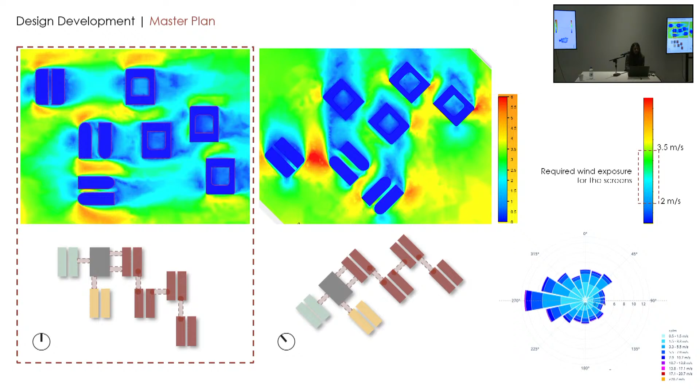The results show that the cluster oriented true to the north received the required wind exposure, between 2 to 3.5 meters per second, for the screen which I'll be adding as a barrier to cut the high wind velocities. For my study, I took the lodging unit and detailed it further with research and design.

The first step was to increase the distance between the platforms to achieve more air movement, and adding curves on either side, based on aerodynamic studies.

The major bifurcation of the program includes communal spaces, open spaces, private spaces, and services, all accommodated within a singular platform.

For the base conditions, the lower platform is kept for the entrance of guests and for future sporting events related to the water.

The courtyards are arranged to connect the indoors and outdoors, resulting in a better quality of spaces. The private spaces, mainly the guest bedrooms, are oriented east and west to maintain privacy and the view to the water.

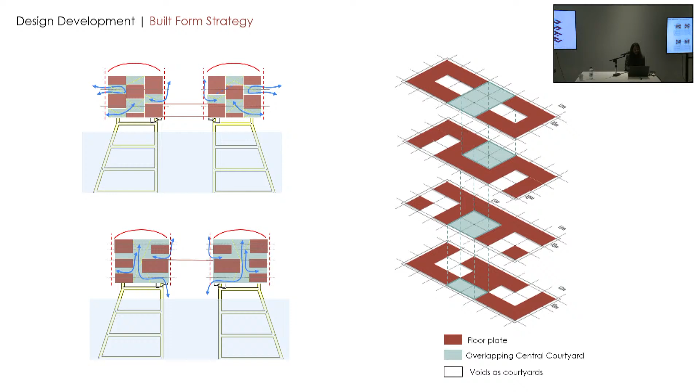The communal spaces are oriented inwards to create a more unified and open envelope. The built form is designed to achieve a lot of air movement through cross ventilation using wind-driven and stack effects. The depth of the floor is not more than 10 meters, matching the existing structural grid of the platform.

As the facade receives uncomfortable winds and lots of radiation, it was essential to design a skin. Precedent studies showed that designing an aerodynamic shape creates less wind force on the facade.

Three screens with different perforations were tested in relation to the interior spaces and courtyards, following the same principle as the precedents, where the screen shades and controls the wind forces.

These tests were done for two major spaces, a room and a courtyard. The results show that screen 1 blocks a lot of radiation and reduces wind significantly but cuts the visual connection, while screen 2 with a 60% perforation ratio performs well for the courtyard, maintaining wind speed, and screen 3 works for the rooms. For the rooms, the captured wind is further controlled through the design envelopes of the individual units.

Taking it further, screen 2 with perforation ratios of 60 and 80 percent is to be distributed across the overall skin of the built form.

According to the aerodynamics of a ship, the built form is achieved with the north and south of the platform having buffers which accommodate public activities and open terraces. The tilt helps in shading, in addition to the screen which controls wind movement.

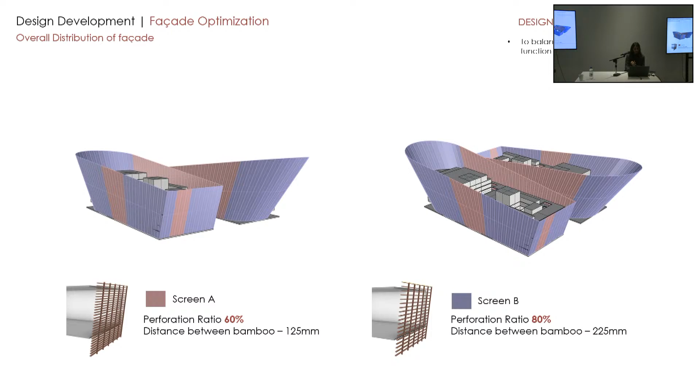The overall distribution of the screen is per the space, where screen 2 in front, which has a perforation ratio of 60%, is in front of the central courtyard. The communal spaces between the platforms do not have a secondary skin. To balance the form, the functions are mirrored to the adjacent platform to have a view of both land and ocean on two adjacent platforms.

The solar analysis shows the cumulative results of incident and reflective radiation from the sea, with and without the screen, which shows a reduction of 20% of radiation for the southwest facade and 30% for the northeast facade.

In addition to the vertical surfaces, as the roof receives the maximum incident radiation, we designed a canopy to allow use of terraces for communal activities with a ventilated roof strategy. I considered two permeabilities of the roof, 40% and 60%, whereas the thickness diffuses roughly 20% of the direct radiation on the roof.

Taking the roof in terms of wind, the roof is designed curved while keeping the screen high, diverting strong winds from the north when it faces the north. Whereas when the lower angle of the adjacent platform faces the north, the wind lets through the slope of the roof, which is designed accordingly.

The unit's roof was simulated, one with the roof and one without, as a result of which the grid roof offsets from about 640 to 480 kilowatt hours per meter square in the period of high solar radiation, from February to May.

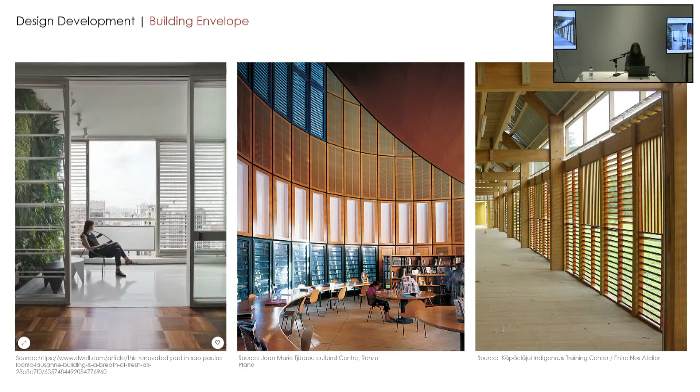Further going into the built envelope of a unit, the idea of the building envelope is to keep it adaptable and connected to the context of water while allowing good air movement and adaptability through the unit. The screen in front of the units, with 60% perforation, controls the wind and provides shade.

The guest rooms open up into the balcony space, and the envelope lets occupants control the light as per comfort and privacy levels.

The average wind falling on the screen is 3 meters per second, decaying to 1 meter per second between the buffer space, and through the envelope it decays up to 0.3 meters per second at the end of 6 meters.

The flow of air is regulated by adjustable louvers, which open when the wind is light to allow fresh air, but close when the wind speed picks up, allowing more adaptable and adjustable comfort levels according to the occupants.

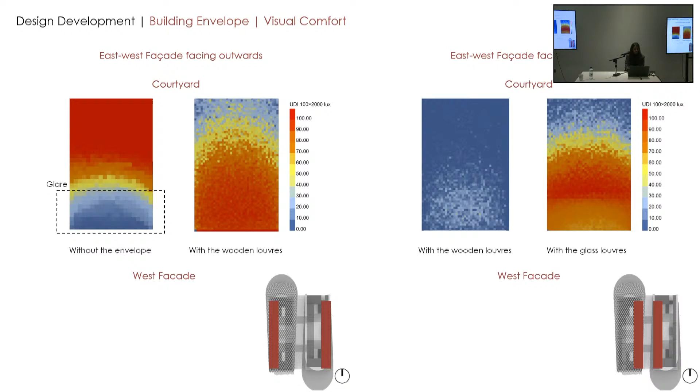So here I've limited the use of glass, but also achieved the required visual comfort for the units facing inwards.

The building has a highly efficient passive ventilation system, which eliminated the need for mechanical air conditioning. The operative temperatures were examined for a day, 15th of March, when radiation is at peak. The results show a 40% improvement from the base case of typical construction to the final case of adjustable louvers and more air movement.

The base floor of the platform has communal spaces promoting more outdoor engagement for water activities and on the decks, as well as for retail purposes.

This is a typical floor, the 4th floor, accommodating guest rooms on the east and west orientation to maintain privacy and connection to the water views as mentioned earlier, whereas the communal spaces are oriented inwards, being adaptable in terms of envelope, with open spaces and only the screen in front as an envelope.

So the top floor accommodates the restaurants and cafe, and taking advantage of the height, the connection is maintained to have an aerial view of the land as well as the ocean.

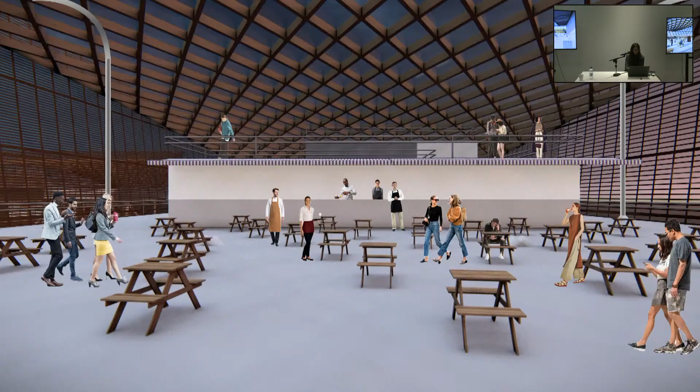With the day passing into the evening, the usage of the space changes to having night views and a more inward connection to the water, which was mentioned earlier.

However, for the courtyards, it was observed that they were acceptable in the month of March at 12 p.m. in comparison to the terraces, whereas at the same time in June, it could only be used as an outdoor transition space. In March, even though it traps heat, a wind velocity of 1.5 meters per second adds the required movement of air for comfort.

So this is a view of the courtyard in the later evening. And this is also a view of the courtyard showing the connection to the outdoors.

So this is a section cutting through the central courtyard, including the terraces and the outdoor spaces, which shows that the built mass has very clear air stratification through the courtyards and the voids.

So combining all the information explored in the project: the screen which controls the prevailing winds, the rooftop terrace acting as a major communal space, the canopy roof as shading, the outdoor shaded spaces, natural ventilation, the use of solar panels which could be promoted on the roof and on the canopy, and the communal gardens facing north which could be used as they're shaded for high radiation periods.

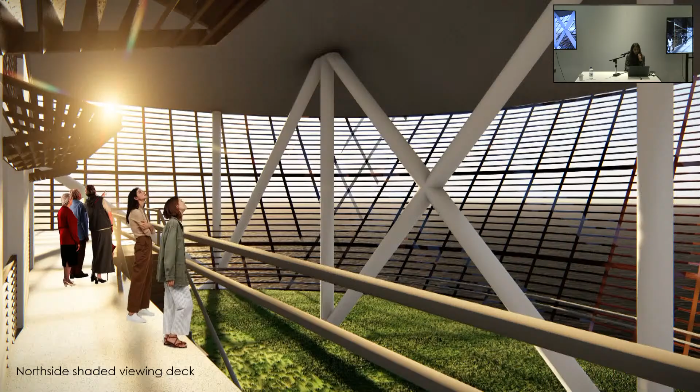This is the same, as we pan to the front of the built mass, and the north shaded viewing decks. These are all the north views on different levels.

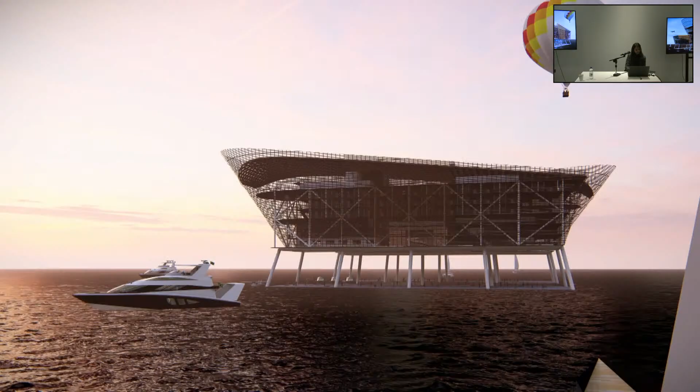So to complement both the purpose of usage and aesthetic on a personal level of architecture forms, this is how a complete research and design outcome is for my dissertation, and these are some more views.

Maybe Flo, can we invite you to make some comments there on the other side? Thank you, Joanna, and thank you, Zil.

I want to first congratulate you on the topic. I think it's very interesting and it is needed, and it's so important that we as designers also try to address these kinds of topics that are needed, and not only something we would just like to do.

I had never thought of these kinds of structures. I think what you brought to the table is extremely interesting and complex, because your site is very difficult. It's difficult to relate to being in the middle of the ocean. So I think for that it's great.

I think that in general terms, the solution you found of putting a screen that would be the same one in all of them is the best thing about your project. It's as if a plugin would come to any of these platforms to make it livable, and it doesn't matter what the inside hosts. Actually, I find a lot more interesting the big move of saying, to make this space livable, we need this screen that will be in this way, and then everything becomes livable. I find that super interesting and a really good project.

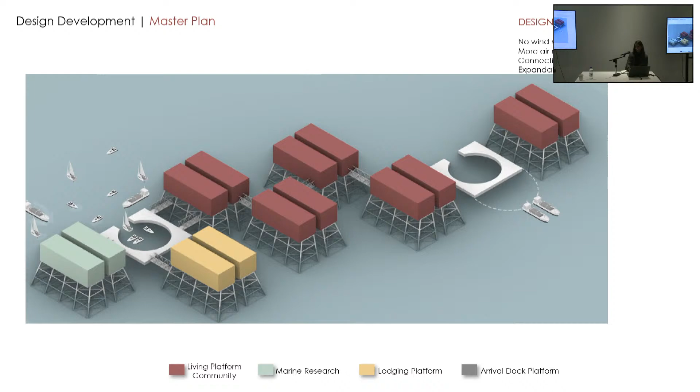My last comment is small but important. You have very nice visualizations, especially at the end, but I never saw any of them showing the access. How can you access from the boat to the platform? There's no stairs, no lift, nothing—you have to put something.

I've not mentioned it in my speech, but I've considered that transition already. Thank you, thank you very much.

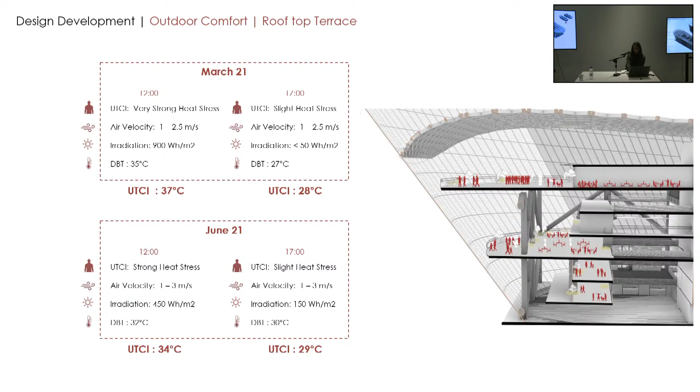Well done, Zil. Great development since a few days ago. I noted here the following, you can quote if you wish: these are floating structures that are made to look like a building that looks like a boat.

Perhaps because of that there is a bit of confusion in our minds about how to treat them—as a boat, as a building, or as some new hybrid. It's very interesting and a very imaginative scheme, and you've done a great job.

The only problem I had with some of these spaces, which I think you have explored quite well, is that they are huge, yet they feel a bit claustrophobic. I think the screen has taken over and covered everything very conveniently. Now you need to see how one can escape, because these people there, they just turn round and round.

Then when we go to the edges, let's see—okay, this is an amazing image, which becomes quite evocative and iconic, you can sell this. But when we enter the major spaces, it appears like there is a lot of wasted space, and I think that may need some further reflection.